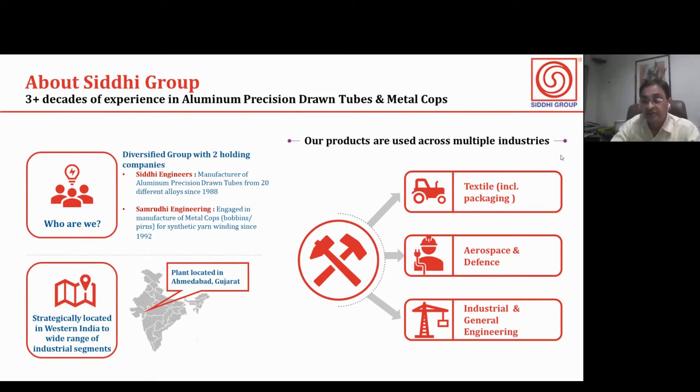Our innovation-led journey aimed at import substitution for India. From 1988, we started our journey manufacturing aluminum precision drawn tubes. Then in 1992, we diversified to manufacture metal cops for synthetic yarn winding. In 1993, we commenced export within the first 6 years of operations. In 2003, entry into aerospace and defense sector by supplying to Vikram Sarabhai Space Center.

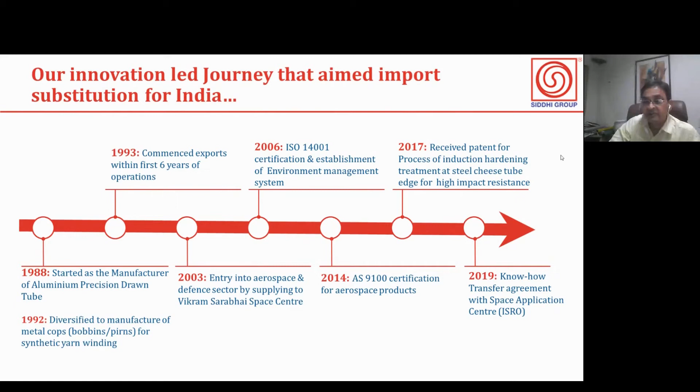In 2006, ISO 14001 certified and established an environment management system. In 2014, AS 9100 certified for aerospace products. In 2017, received patent for process of induction hardening treatment at steel cheese tubes edge for high impact resistance. In 2019, know-how transfer agreement with Space Application Center, ISRO.

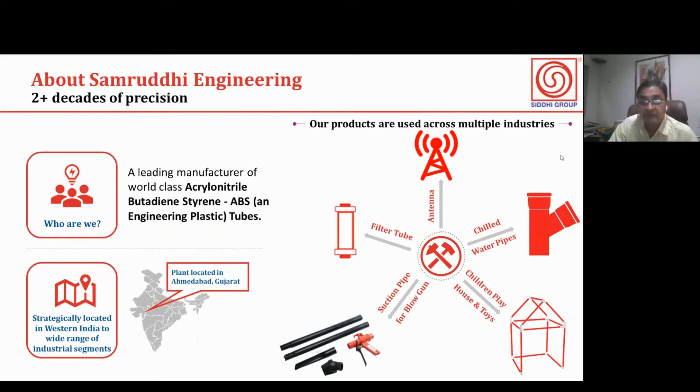About Samruddhi Engineering, a leading manufacturer of world-class acrylonitrile butadiene styrene, that is ABS, and engineering plastic tubes. Again located in Ahmedabad, our products are used across multiple industries like antennas, chilled water pipes, children's playhouses and toys, suction pipe for blowguns, filter tubes, and other applications also.

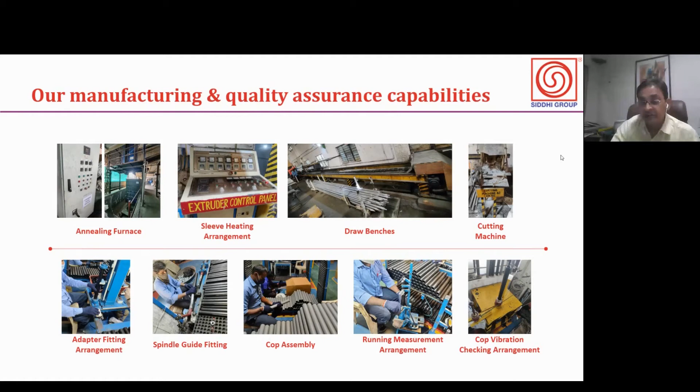Our manufacturing and quality assurance capabilities include annealing furnace, sleeve heating arrangements, draw benches for aluminum precision drawn tubes, precision cutting machines, adapter fitting arrangements, spindle guide fitting arrangements, COP assembly, running measurement arrangement, and COP vibration checking arrangements. That helps us manufacture a wide range of products: aluminum precision drawn tubes, metal and plastic cops, aluminum and steel cheese tubes, plastic tubes and accessories.

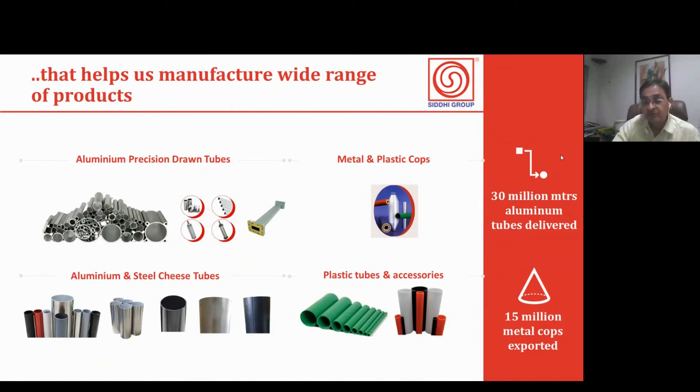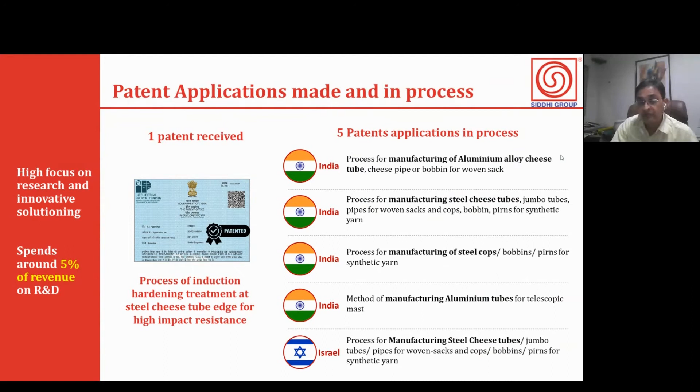Then, process for manufacturing aluminum alloy cheese tubes. Another patent applied for manufacture of cheese tubes, jumbo tubes. Manufacturing of steel cops, bobbins, pirns for synthetic yarn winding. Again, one more patent for method of manufacturing aluminum tubes for telescopic mast. And we have applied one patent in Israel for process for manufacturing steel cheese tubes, jumbo tubes, pipe for woven sacks, and cops, bobbins, and pirns for synthetic yarn industries.

Innovative team and culture building practices being adopted at our organizations are daily exercise, prayer, and good news sharing, quarterly Karma Yogi meet, graveyard for negative thoughts, and a good book every month to all the team members with their salary. We are happy to inform the audience that till now we have distributed 112 books, and this is almost more than 8 years continuously without a single drop we have achieved this.

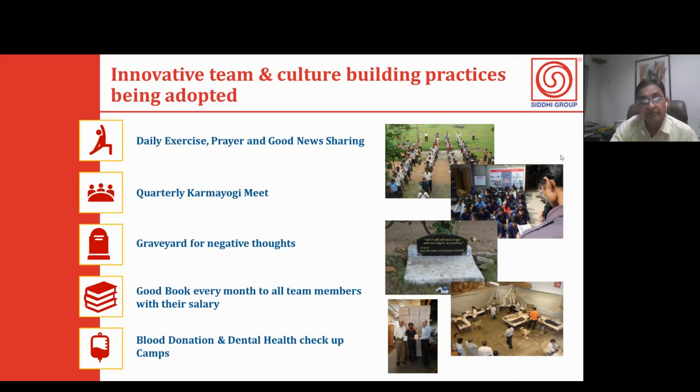Blood donation and dental health checkup camp at our factory. Media publications - we have been covered by varieties of medias due to our contribution to different applications like Mars mission and Moon mission. Our tubes are used, and rightly pointed out, sky is the limit to the aspiration.

Now let us come to the ABS tube, where we can use ABS tubes. Since it's an engineering plastic, you can do threading, knurling, plating, grooving, and notching also on these tubes.

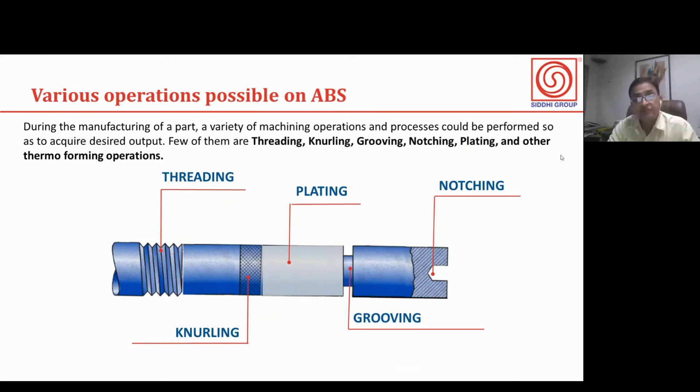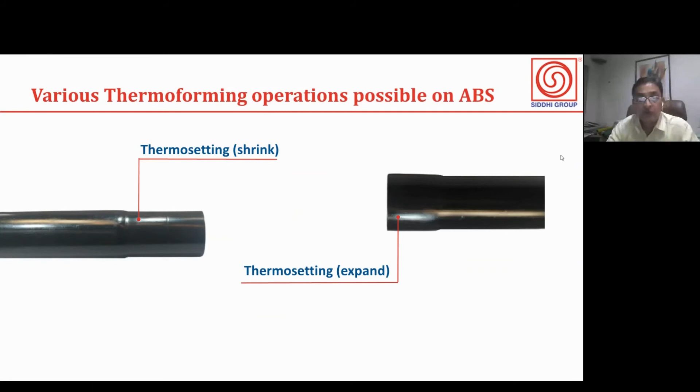Various thermoforming operations on ABS are possible, like shrink and expand. You can shrink one end, you can expand also without any problem.

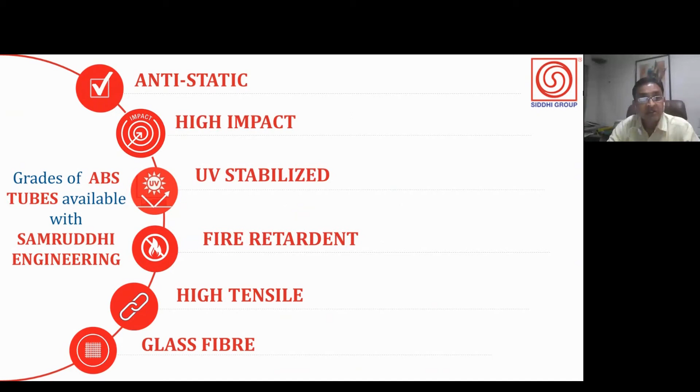Varieties of grades available at Samruddhi Engineering for tubes - anti-static grade, high impact grade, UV stabilized grade, fire retardant grade, high tensile grade, and glass fiber grade are all available. So you can have the tubes with all this grade material available with us.

ABS tube range: outer diameter is 10 mm to 75 mm, thickness is 1 mm to 4 mm, and length as per customer's requirement, but limited to 5.5 meters for easy transportation from one place to another.

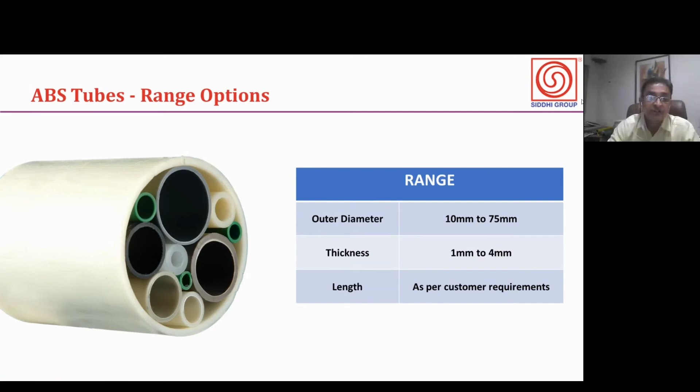ABS tube colors available are natural, blue, gray, green, black, violet, red, and any other special color can also be developed depending upon the quantity required by the customers.

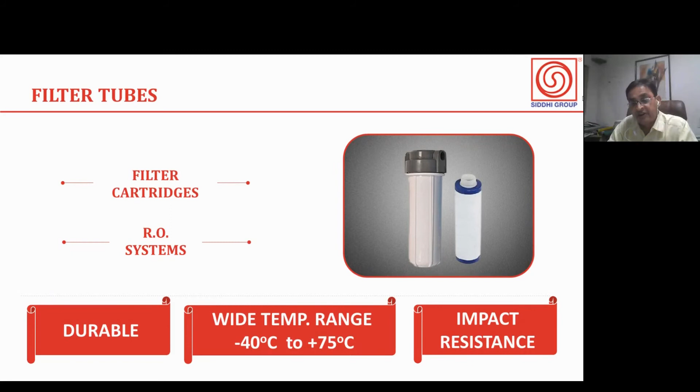Regarding end applications, our ABS tubes can be used for filter cartridge and RO systems because it is durable and has a wide temperature range - ABS can withstand minus 40 degrees centigrade to plus 75 degrees centigrade. It also has the best impact resistance properties.

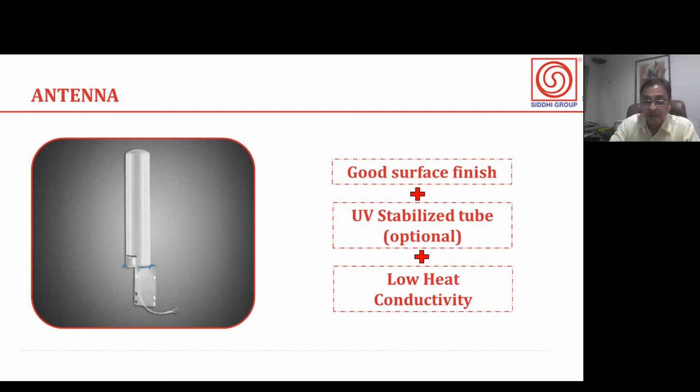For antenna applications, being an engineering plastic with styrene added, it has a good surface finish. UV stabilized tubes are also available since antennas are mostly used for outside applications, so it's optional - customers can choose UV stabilized tubes. It also has low heat conductivity, which is an inherent property of ABS.

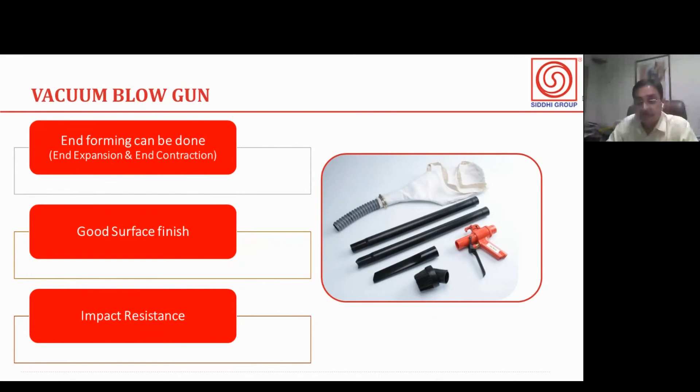For vacuum blowgun applications, end expansion and end contraction is possible, with good surface finish and impact resistance - again due to engineering plastics. For children's playhouses and other toys, it's durable due to high impact resistance, lightweight with high tensile strength, and has good surface finish due to presence of styrene.

And for this we have three different connectors also available. A 120 degree connector is available - we already have molds and everything for it. Also 40 degree connectors and normal connectors.

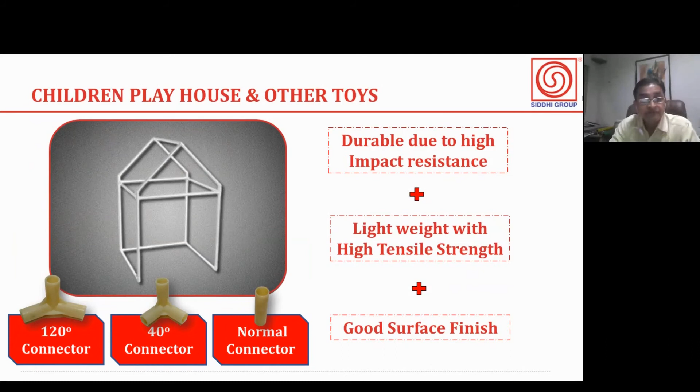I would like to play a video for ABS tube.